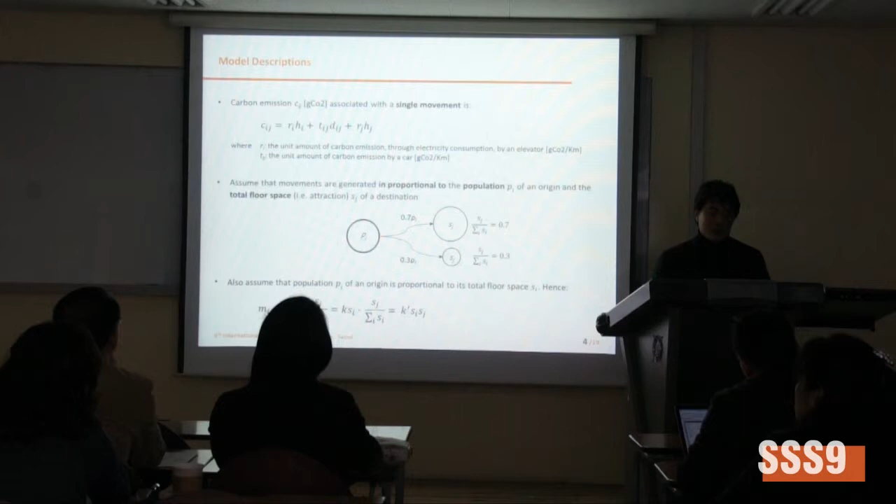We also assume that the population at the origin is proportional to its total floor space—this is a typical assumption in the traffic engineering field. So we have the equation for the amount of movement from I to J, which is proportional to the product of floor space of origin and destination.

The total amount of carbon emission produced by multiple movements between two buildings becomes the unit amount multiplied by the total amount of movements. We sum these values relative to the origin to get the carbon emission potential of the individual building, so we have just one subscript here.

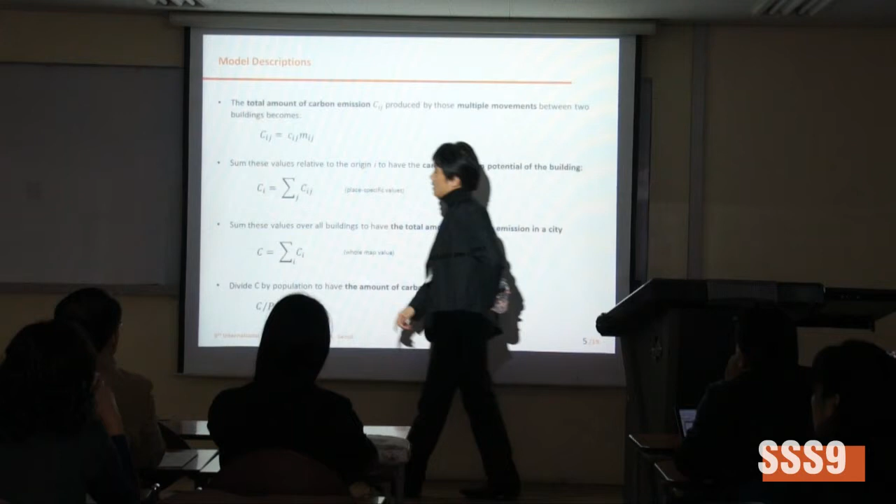Now we sum again these values over all buildings in the area to get the total amount of carbon emission in a city, so we don't have a subscript in this equation. Dividing this total amount by population gives us the carbon emission per capita.

For simplicity, we assume these are parameters for distance and height, for elevator and cars. We assume they are all global parameters, meaning they remain invariant for all places and all types of elevators and cars.

In that regime, we estimate from the data that the unit amount of carbon emission for elevator is 611 grams CO2 per kilometer. On the other hand, for cars it's 239 grams CO2 per kilometer, which is far smaller than elevator.

This is a rare case, but in real cities, elevator height is not that high. So when you compare these two values in total, the carbon emission produced by using elevators is much smaller than that by cars, of course.

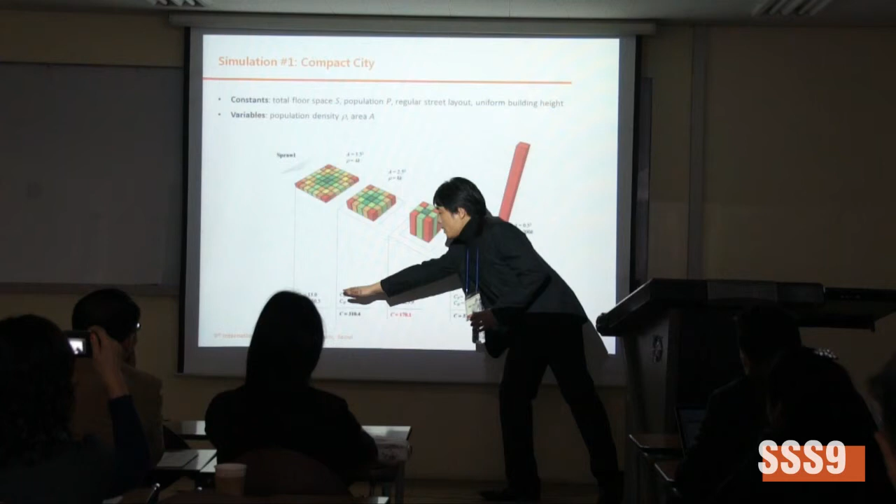So density is changing, increasing in this way from sparse state to compact state. As you can see, as it becomes compact, the vertical part of the carbon emission increases, but the horizontal part decreases because the city becomes more compact.

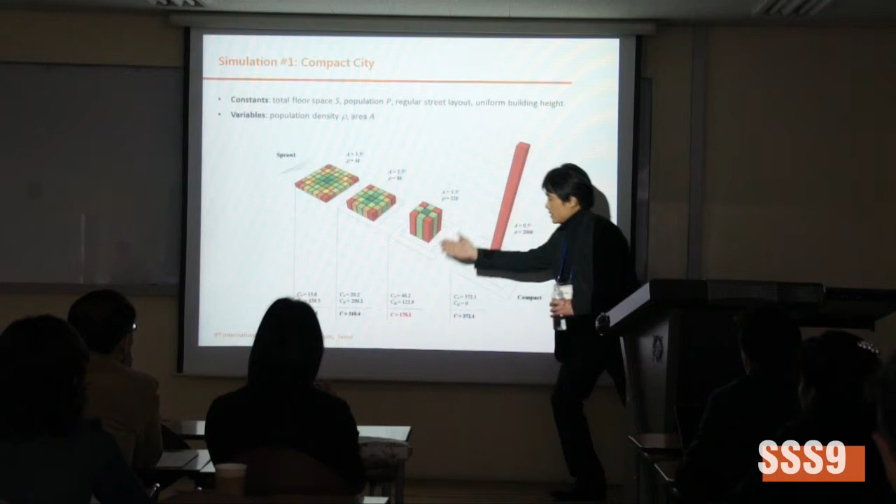But there is a kind of minimum point in the total amount of carbon emission, here in this case. If we plot these variations of the horizontal part, vertical part, and total carbon emission amount, we get this kind of curve which has a minimum point in it.

It is because compactness brings about an increase of the vertical part of carbon emission, while the horizontal part decreases. So when we sum them, there should be some kind of minimum point here, which we call the optimal density, where the total amount of carbon emission is minimized.

But such an optimal value does not always exist. It does not exist when population is not large enough, and this is our case in our simulation.

But if we decrease the population, the carbon emission just decreases continuously without having a minimum or turning point. This means the argument for compactness regains most of its power only when the population the city needs to accommodate is relatively small.

If it is too big a city, then we cannot just make the city compact with very high buildings without cost. There is a cost which you have to pay.

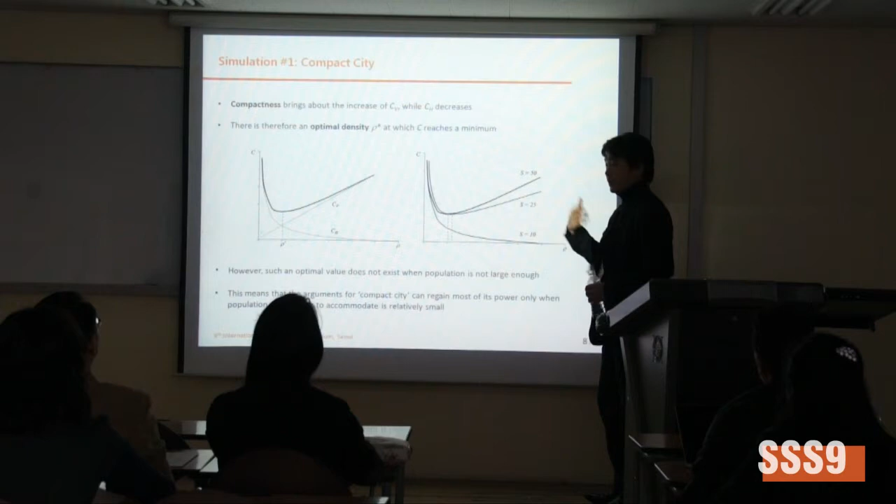This is the second simulation, and now we are moving beyond compactness. In this case, the constants are still population and floor space, which are the same for all nine diagrams, and we also assume the population density is the same.

We start from this uniform distribution or configuration, which as we have seen in the previous simulation is not optimal for this size of city. But we'd like to see if we change street layout and building heights, how far these variations in physical configuration can make the carbon emission amount decrease toward the optimal point.

So if you look at it this way, let's say there are columns.

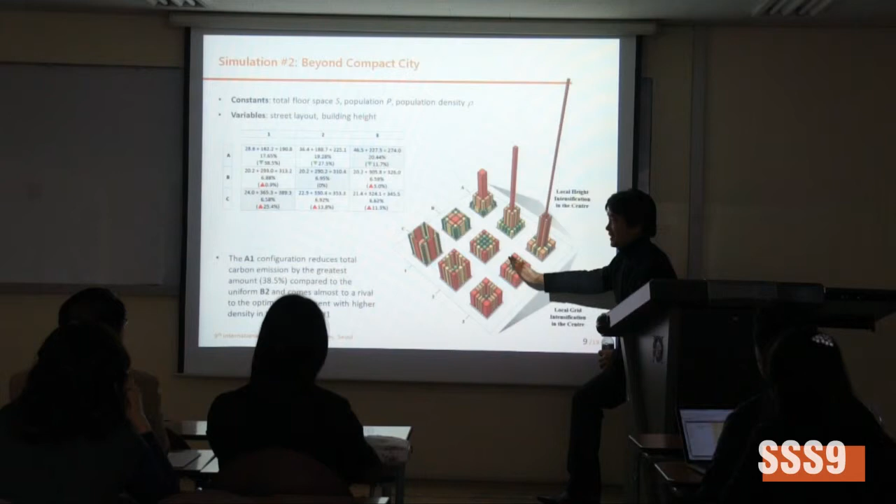This row, there are 3 rows in this way, right? Represent the local height intensification in the center. So buildings at the center will have a higher value, but in this way, if we move from the first column to the third column, we'll see grid intensified in the center. So there's a kind of nine diagrams in this matrix, right?

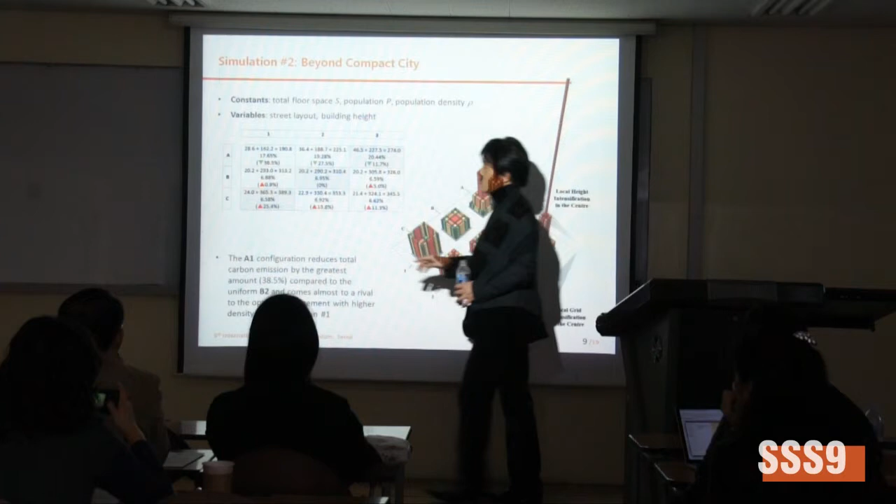And if we calculate the total amount of carbon emission, which is composed of vertical part and horizontal part, you can see this kind of result, which shows that in reference to this uniform distribution, we can have the minimum carbon emission at A1 configuration, which is a kind of height is very high, building space is very high at the center, but grid is not that dense.

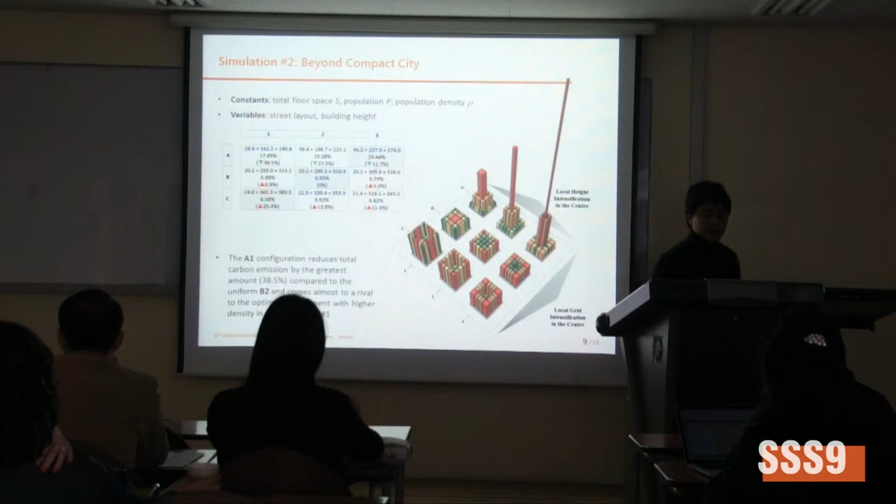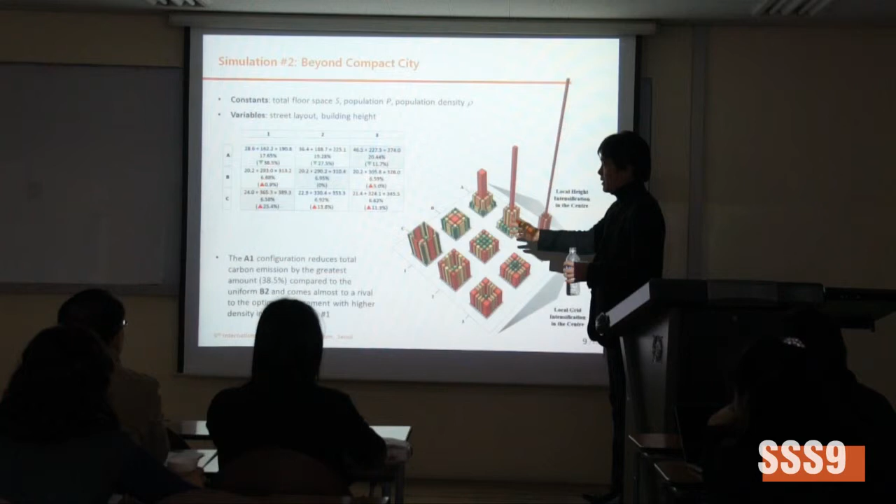Grid is all, more or less sparse in the center. Okay, and because in this case it's not very realistic, we have to see that all these values are increasing compared to this distribution or configuration. So, to say that with varying this physical configuration, we can almost achieve the original and optimal arrangement with a higher density in the simulation, in the first simulation we have seen.

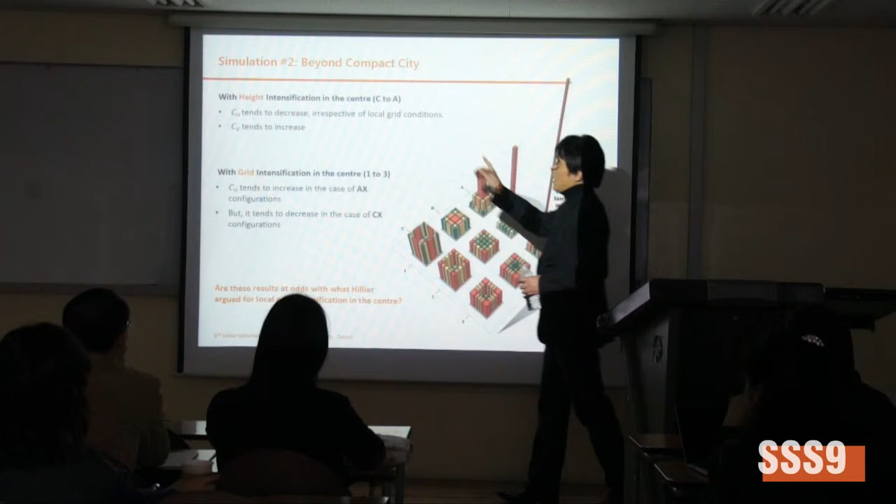If we look at carefully those variations, we can summarize the result as in the following. For the height intensification in the center, C to A, we see that horizontal part always tend to decrease, okay, irrespective of local grid conditions. And also, vertical part obviously should increase as the building gets higher in the center. But for the grid intensification, there is no such clear tendencies here.

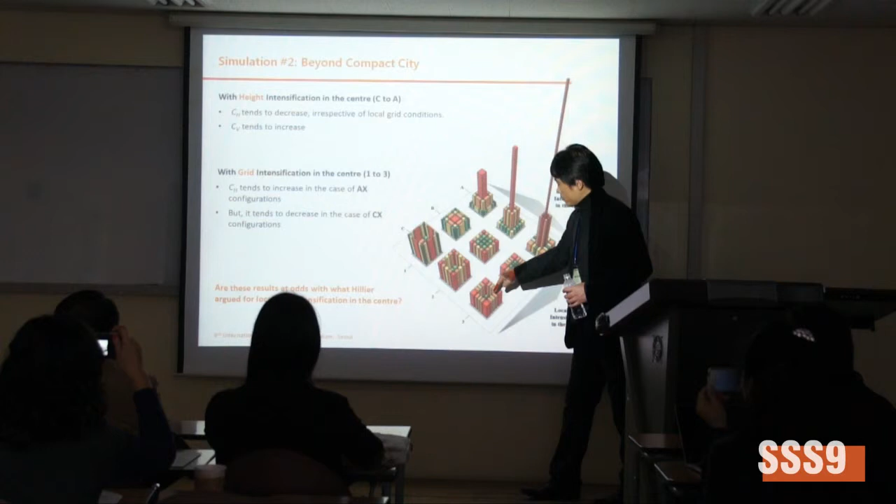If we look at the series from 1 to 3, horizontal part of carbon emission tend to increase. For instance, in the case of AX, horizontal part increases from here to here, but it tends to decrease in the case of CX. If we see that we are moving from here to here, the carbon emission will decrease. Yes.

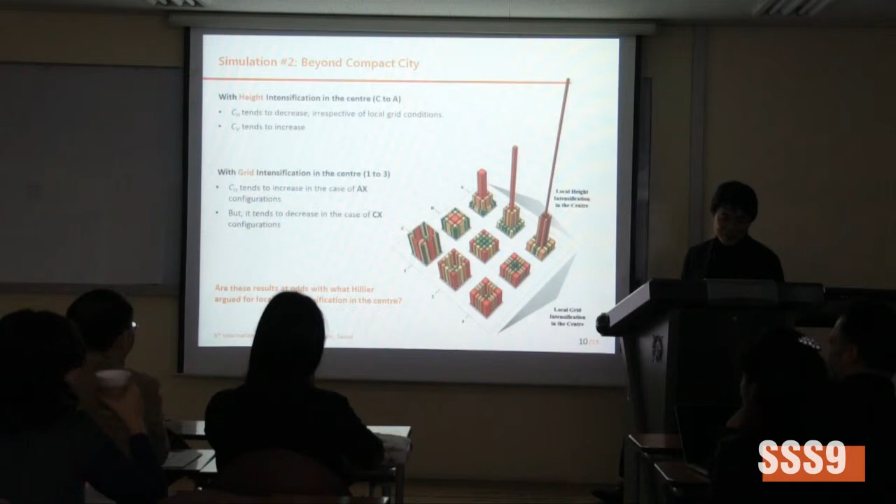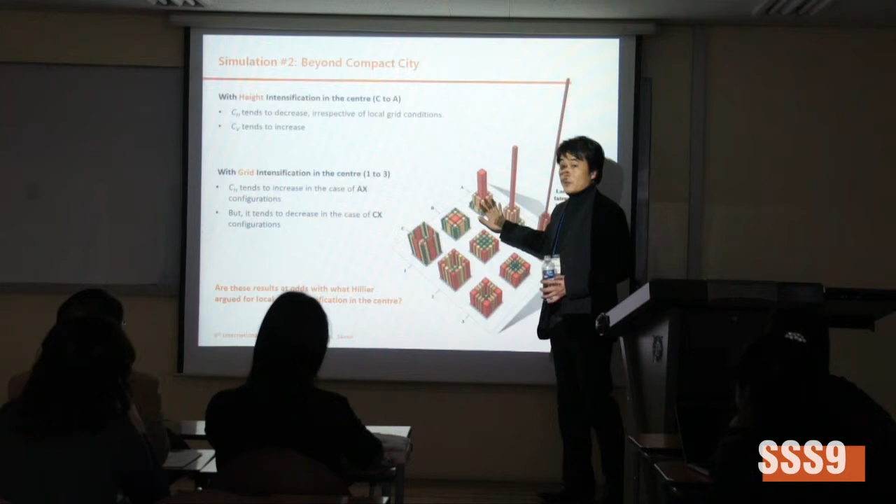So, question. Are these results at odds with what Hillier argued for local grid intensification in the center? Right? This is the opposite case to what he has shown to us.

In Hillier's idea of local grid intensification in the center, distance is unweighted, as you know. In our model, this is distance in horizontal movement is weighted by the total floor area by individual buildings. That's the difference, crucial difference.

If you consider positively that Hillier's idea of local grid intensification assumes not unweighted, but same weight of total floor area, then we can verify that local grid intensification in the center does bring about the decrease in carbon emission. For instance, if you follow this series from C1 to B2 to A3, then the total amount of carbon emission will decrease as it predicted.

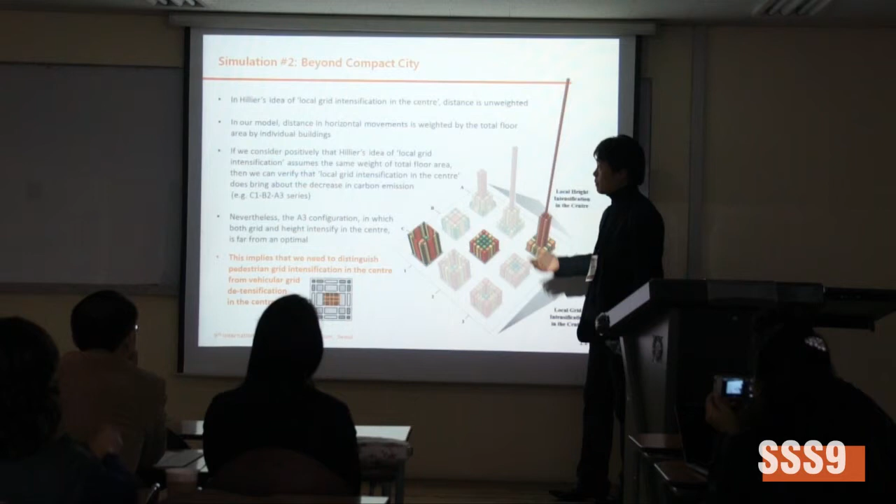Nevertheless, the A3 configuration in which both grid and height intensify in the center is far from optimal, as we have shown. This is close to the optimal. It's the best one in these nine configurations.

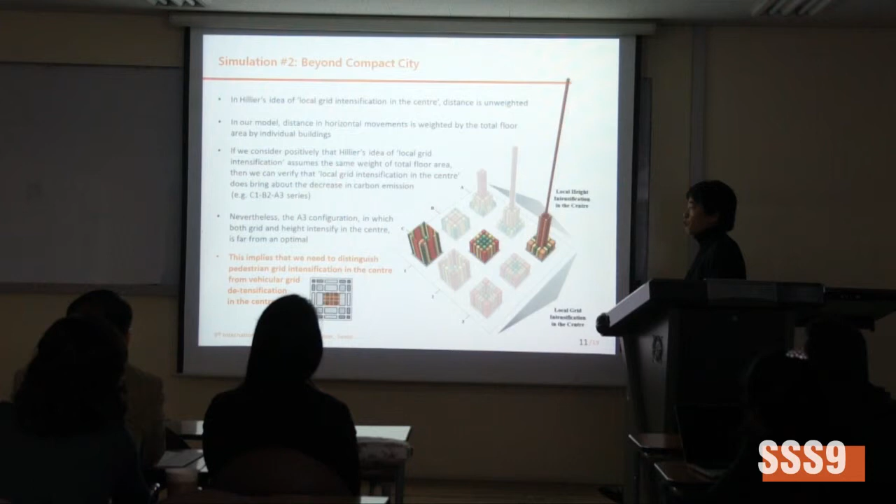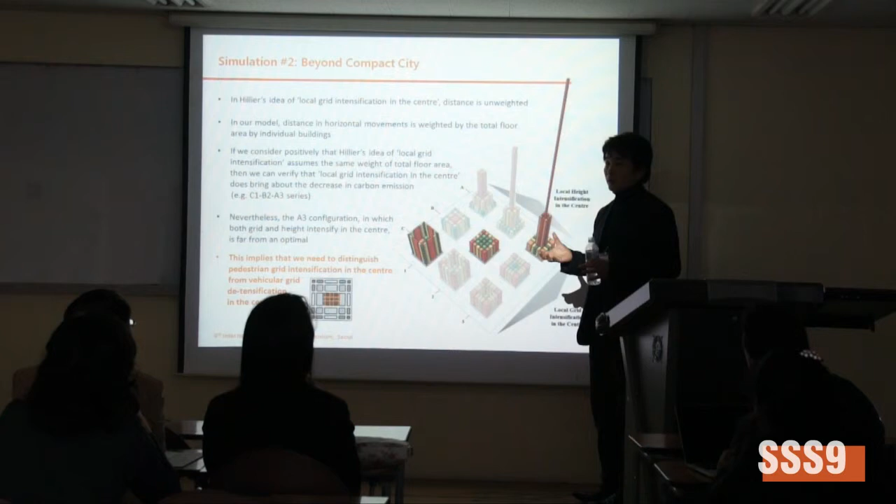So this implies that we need to first distinguish pedestrian grid intensification in the center from vehicular one. Well, because Hillier didn't take into account this distinction, so we are considering only vehicular movement in this model.

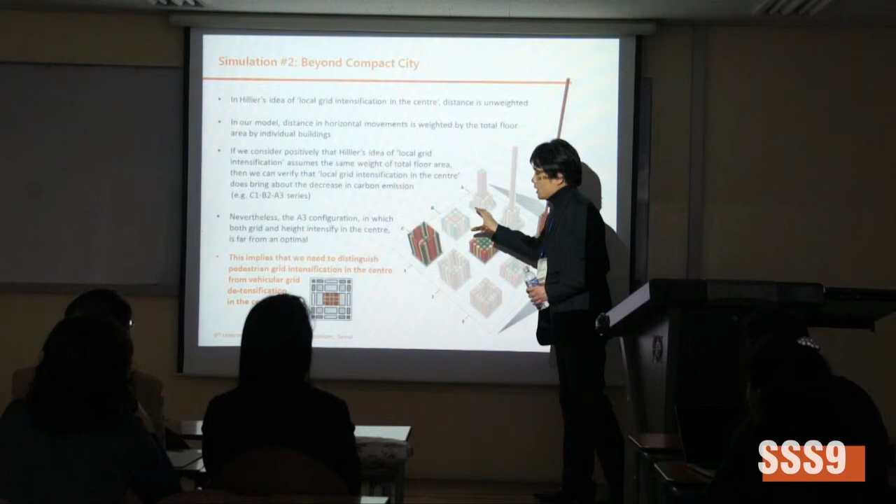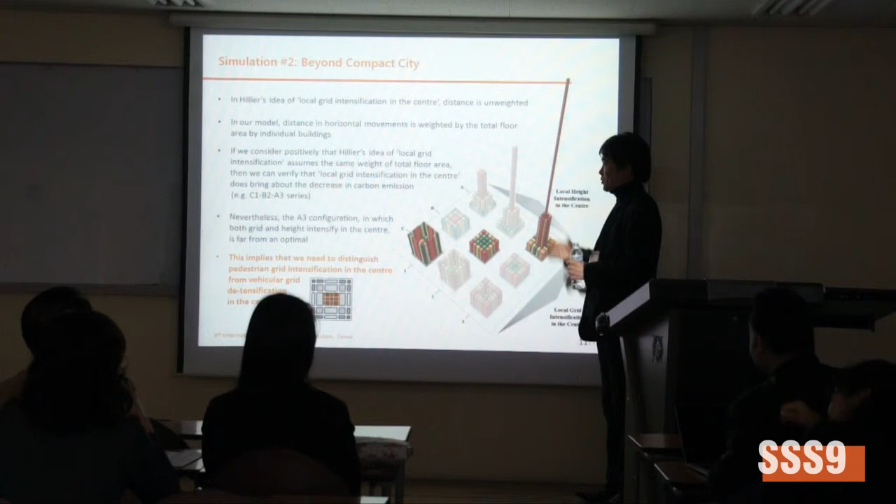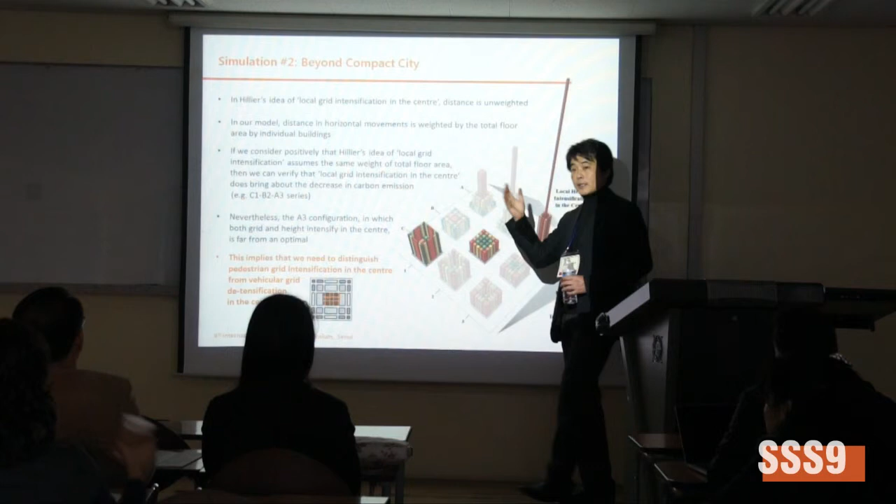So for vehicular movement, it is better for the center to be sparse as far as it can. But for the pedestrian movement, it should be dense enough according to what Hillier suggests. So if we put them together, we can envisage this kind of dual grid network of pedestrian and vehicles.

Now I will apply this model to a real case study, to the New Town project in Seoul, where I need to introduce a bit about this project. Initiated by Seoul Metropolitan Government in 2002, New Town project denotes large-scale urban redevelopment, which aims to systematically reorganize outdated residential quarters and to foster urban core in the undeveloped areas toward a more balanced development.

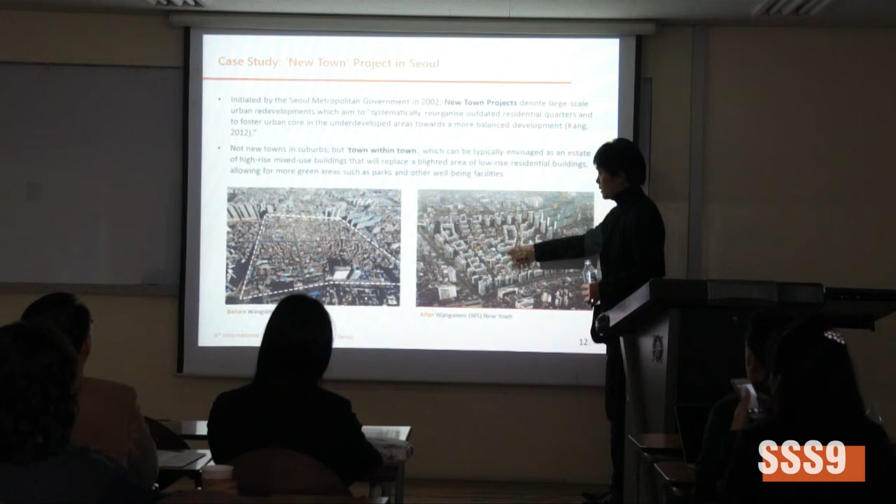This is not a Newtown suburb, but a town within town concept, which can be typically envisaged as an estate of high-rise mixed-use buildings that will replace a blighted area of low-rise buildings, mostly residential, along with more green areas such as parks and other well-being facilities. You can see much green spaces in here. So this is before the project and then after the project.

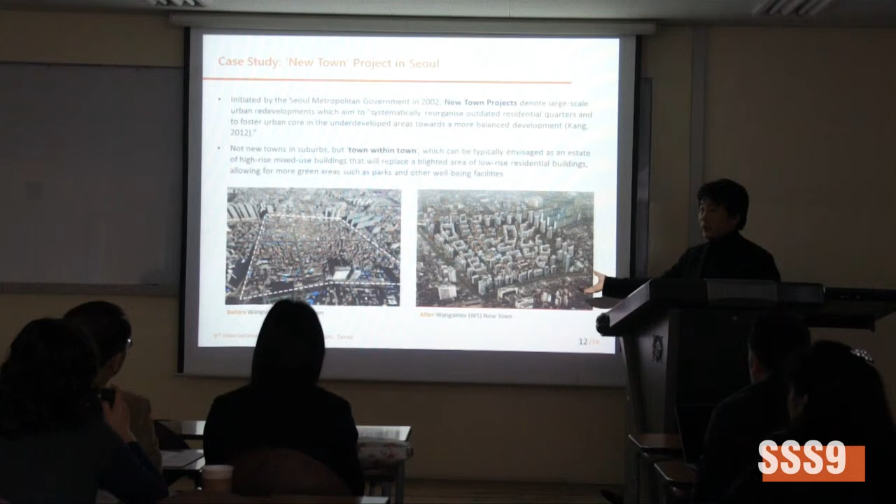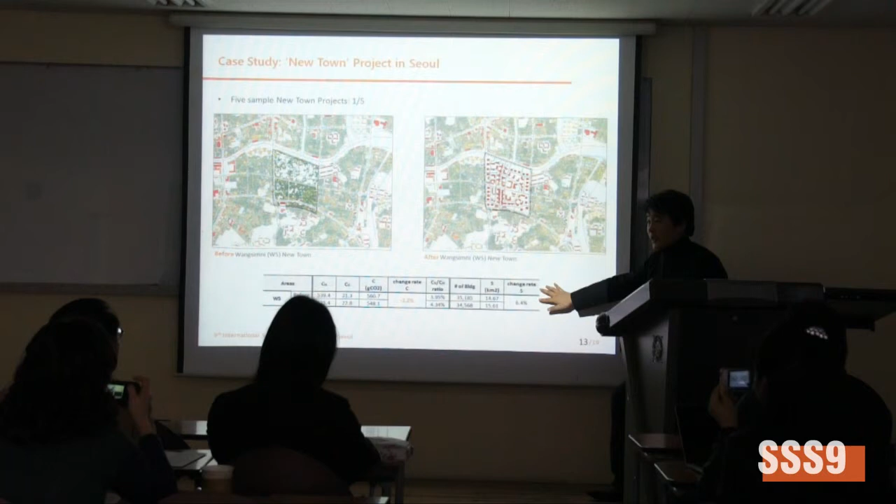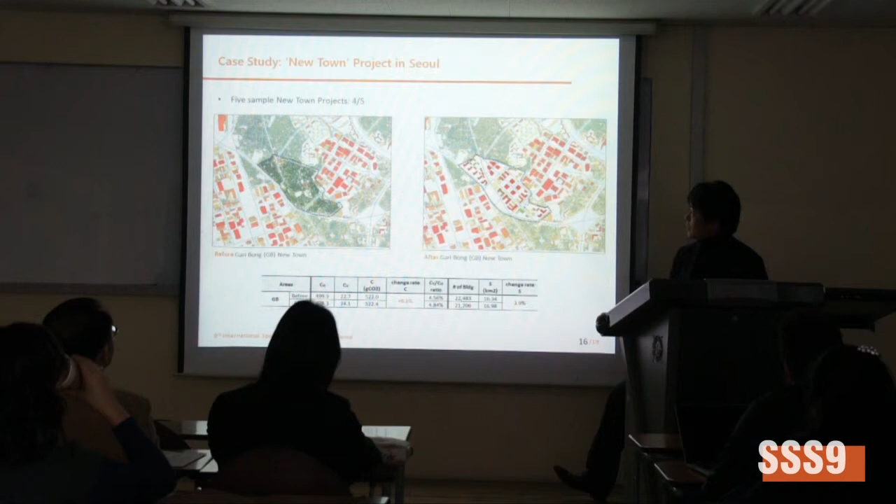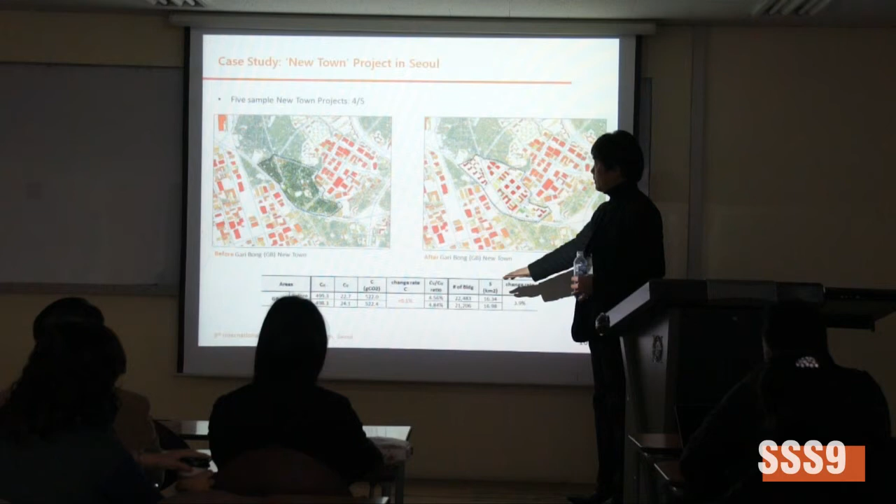The same goes for the area called Dong-E Newtown, with a smaller change. But in this case, for Gan Bong Newtown, the total amount of carbon emission increased on the contrary. Well, maybe it's because in this area there are already massive buildings around this site, so the effect of this development can tend to be diffused surrounding it. That's what I guess.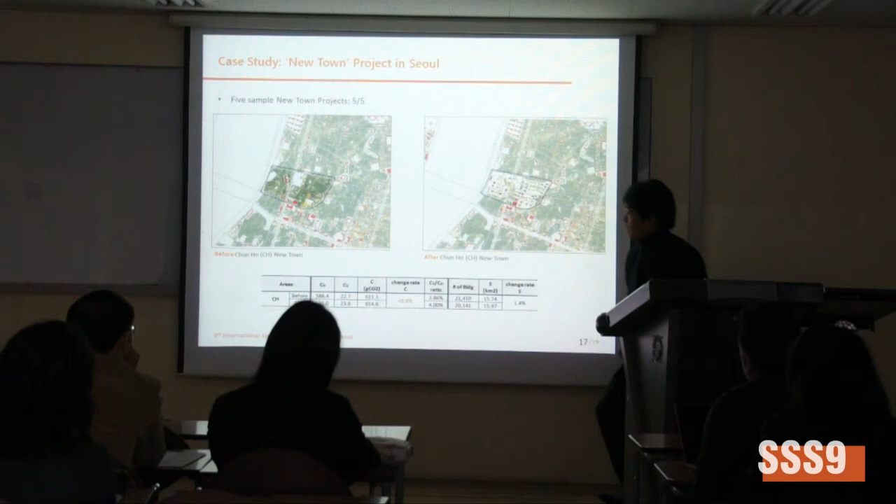And for the Chun Ho area, this is the worst case among those 5 samples. It will increase the carbon emission by 0.6%. This is perhaps because the location of this project area is at the riverside, so it can have a kind of local grid intensification effect in the center. It's more or less similar to periphery development.

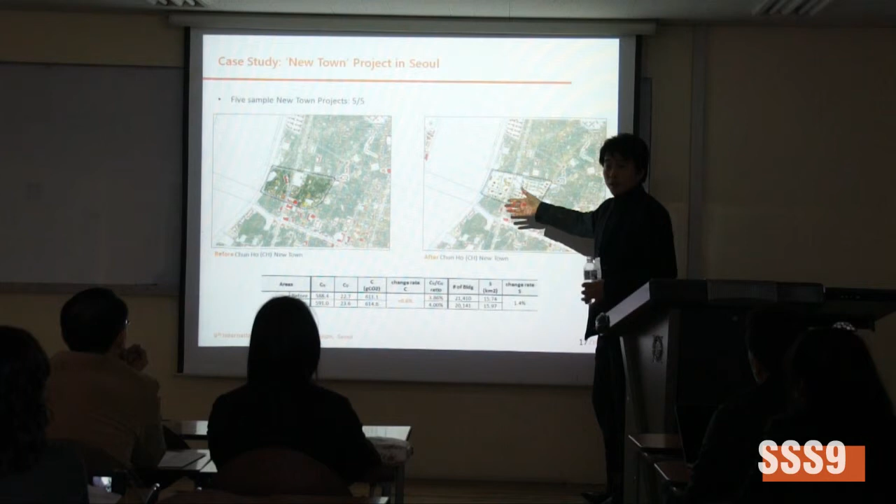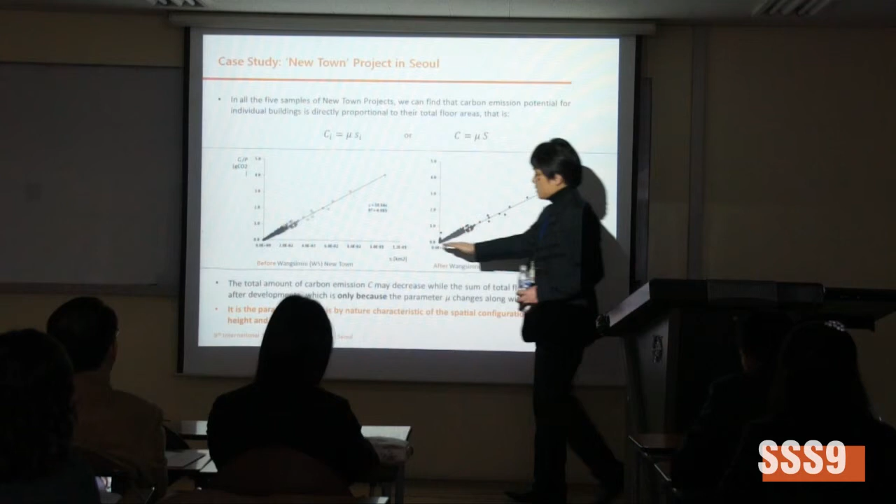Now, in all 5 samples of the Newtown project, we can find that carbon emission potential for individual buildings is directly proportional to their total floor areas, as we can see in this scatter graph, before and after, for Wangsimni development. This is total floor space for individual buildings, and this is carbon emission per capita for individual buildings, which I call carbon emission potential.

And it can be summarized as this simple equation. The regression equation has been set to have the origin, and we can't see the intercept part here. It can be set like this or this. So the total amount is just proportional to the total amount of the floor space area.

What I suggest is, at first this seems pretty much an obvious fact: as total floor space increases, the population will increase, and carbon emission amount will increase as well. But as we have seen in the previous examples, there are some cases in which carbon emission decreases, even though there is a clear dependent relation between these two variables. So what happened?

Actually, the total amount of carbon emission may decrease while the sum of the total floor area increases after development, only because the parameter here changes along with the development. So what I'm saying is that it is the parameter mu that is by nature characteristic of the spatial configuration of building height and street layout. All the information is hidden in this parameter.

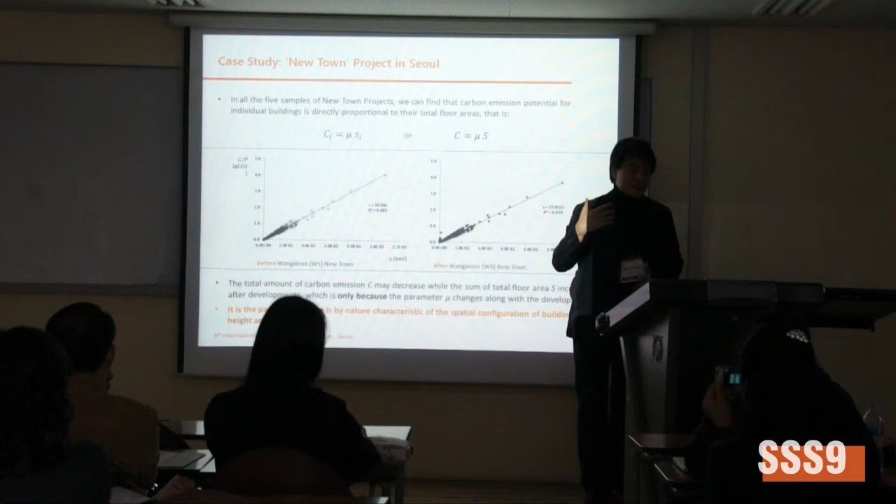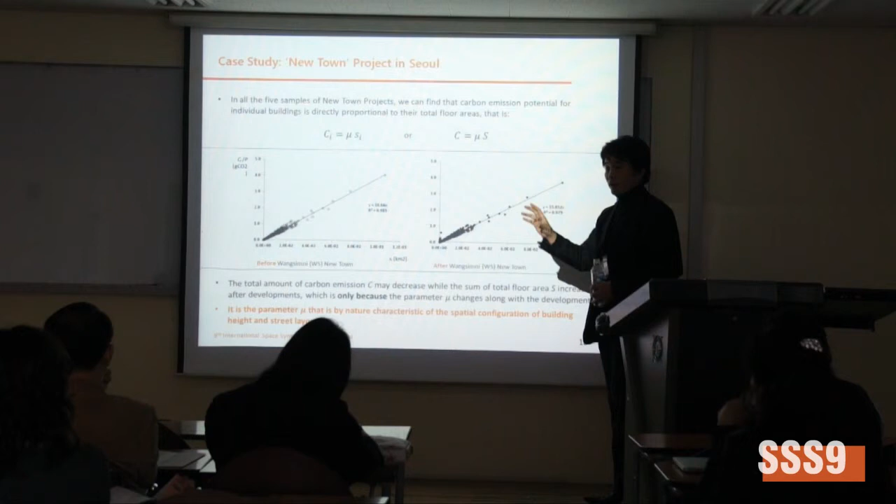So we can say that not only is carbon emission proportional to the size of buildings, but also that the total amount of carbon emission is affected by the configuration of those buildings and the street network.

Now, conclusion. Based on a space configuration model to estimate carbon emission, this paper has located what can be discussed further within the current discussion on compactness.

However, the model can be made more realistic by taking into account building usages, lifestyle, residence, and so on. The implication of the results may be interpreted differently depending on the scale of areas under analysis. So a large central part is good for vehicle movement, but how large should it be? If it is too large, it will be difficult for pedestrians to move around.

And we need to develop a way to calibrate the carbon emission amount this model estimates relative to the real amount observed with vehicle and elevator movements. But it's very difficult to apply real data. We also need to overcome computation costs.

Currently, this model is based on the UNA ArcGIS extension, made by... probably you know that name. In my experience, it takes roughly about 10 hours to compute 20,000 buildings. So if we need to broaden the area in which this model can apply, then we need a different platform, or a supercomputer, or something. That's it.

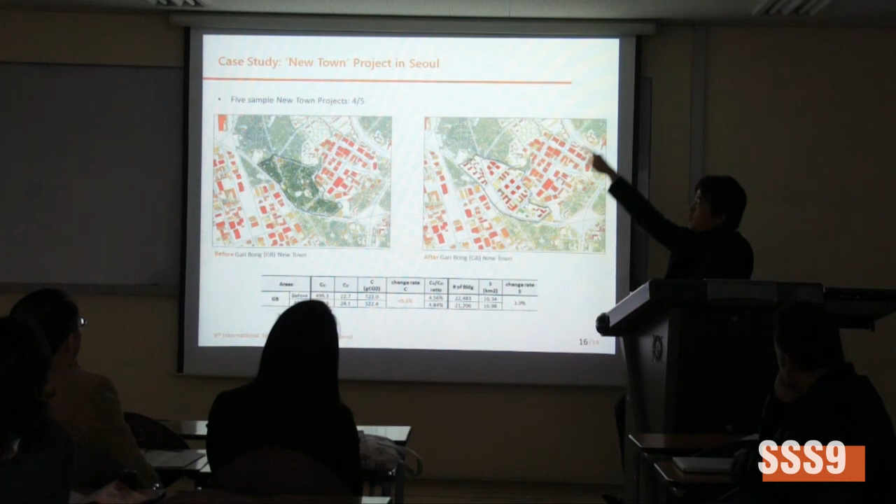Sure, that's really difficult. In our case, I applied a 4-kilometer circle around the Newtown project area, but it's highly artificial, of course. And also the carbon emission amount will be dependent on how big the area is. We try to apply this model to small or middle-sized cities because in that case we don't have this kind of problem of defining boundaries. But the problem is that for middle or small-sized towns, it's really difficult to get height data or whatever data there is. So that's why we chose to apply this model to larger cases. But it is highly critical how we define boundaries for this kind of research.

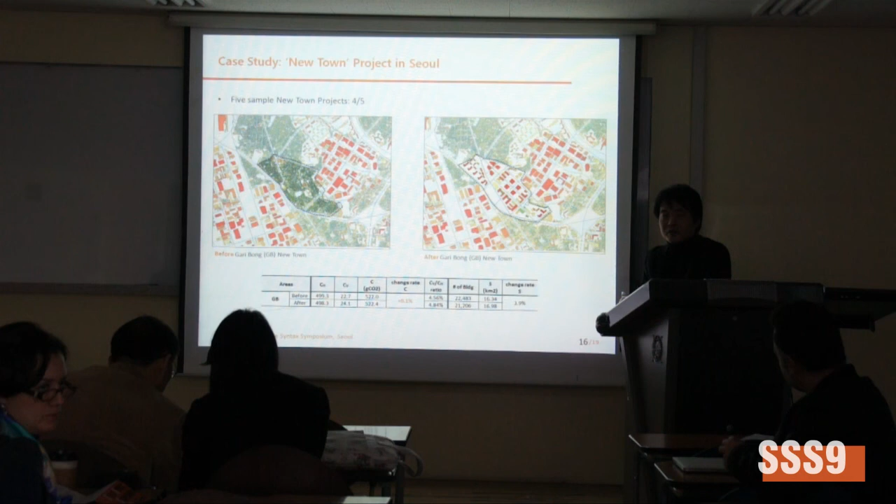Yes. I thought it was a very interesting presentation, but I was thinking about what you actually say - that if you concentrate your floor space in the center, that's a good thing if you want to reduce carbon emissions to a certain extent. But it has to do with the fact that you stop measuring at a certain level, you define your areas, because it might be that another distribution has the potential to facilitate more floor space than another solution. So it might be the case that if you took the whole city into account, the choice for a certain solution means that you have to grow further out in the territory. So I think that needs to be included somehow.

Though it's tough, but I think there are some ways. It's very interesting. That's it, want to take your...